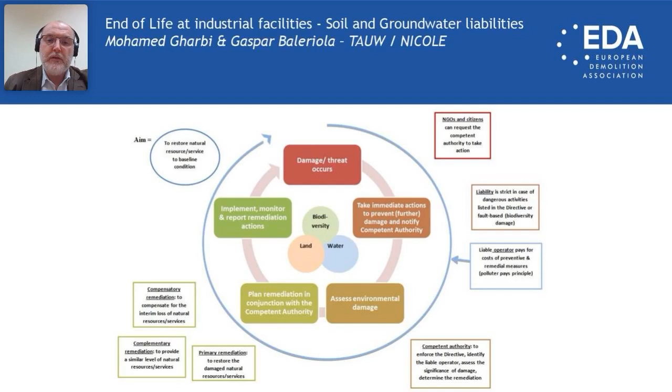So this is a process that involves the whole life cycle of an industrial facility, because you have to do that in advance. You have to plan in advance what kind of damage you are going to do, to get a risk assessment, an industrial risk assessment for that, and have somebody say how much damage is that, what are the chances of that damage happening, and then setting a value of that damage. So we go into that in the next slides.

So if you are a contractor in demolition, are you affected by this? Well, not directly, because you are not the operator of the facility. Only the operators of the facility or the owners of the land. If this is a brownfield, for instance, maybe you're asking, I'm going to make a demolition of a brownfield, which is difficult to say who is responsible for that. Then the owner of the land will be liable, okay?

So this is going to take place at the end of life of a facility, then demolition has everything to do with it, because usually all these kinds of works of remediation and restoration take place in this end of life step. So maybe even you, as a contractor, will be the one who is going to carry out the restoration of the damage, which in this case will be a soil or groundwater remediation. So again, you can even be affected directly by this directive if, by this negligent or default option, you may be causing an additional damage to that.

You know about this, because maybe you have to contract insurance for your work. Your insurance is going to be more expensive because you are dealing with hazardous substances, and because of the possibility of you, as operator of the demolition, causing any kind of damage. So following the polluter pays principle, who is going to pay for all this? Well, of course, it will be the polluter, the operator, but that's our clients. So how are they going to pay for that?

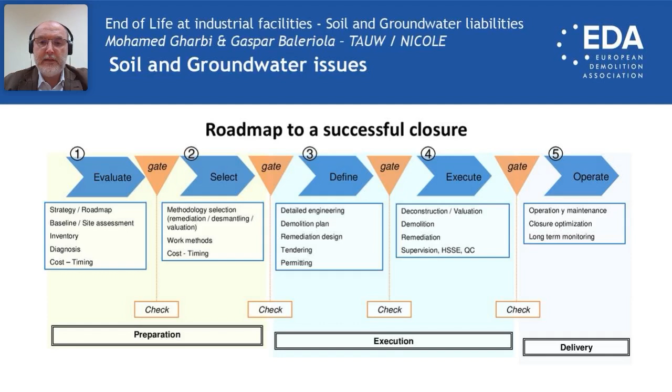And finally, you will be delivering the demolition with the soil and groundwater remediation, and have your permits to go away and make the actual closing down of the facility with no further liability.

So into the final part of my presentation, I'm going to speed up things a bit. Some more tips about soil and groundwater.

Be clear that when you are going to do remediation, you could take some of the affected soil by excavation along with underground structures, but that's not going to be the solution in general, because that will only address a fraction of the problem. Always think that groundwater is going to remain an issue, and this could be for years, even decades.

Be sure that you don't have a substantial groundwater impact, because that is an order of magnitude more complex than soil affection. You have to make sure that you have all the sources planned and mapped. During dismantling operations, you have to be very careful about tanks, pipings, and everything, because that could cause additional damage to what you already have.

And of course, you have to take into account all of the extra waste made by the remediation works into your waste management plan, because sometimes it could be even more substantial than your own original waste plan.

And of course, you have to make monitoring works not only for your demolition works, but also for these two components, water and land.

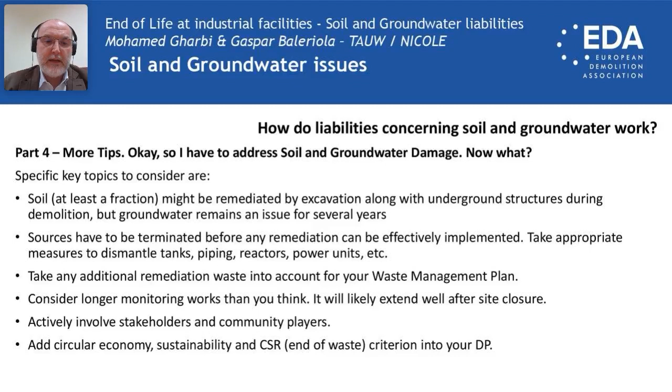Some useful tips: you should involve stakeholders and community players into your plan, because that will save you a lot of time and social pressure. Make them part of the solution, don't turn your stakeholders or the community players into a problem. They are also part of your plan. And try to make that in a sustainable and corporate responsible way.

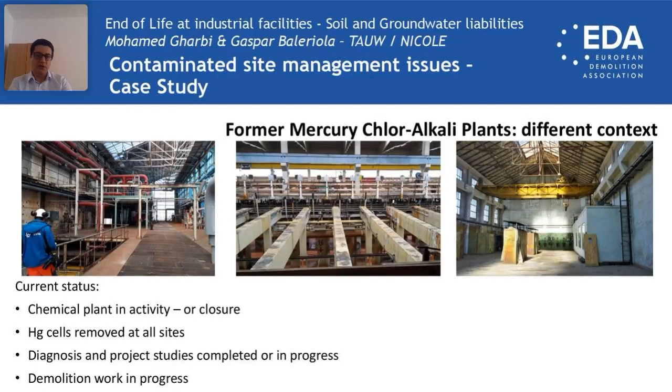What about the process? So we have here a former mercury chlor-alkali plant. I want to summarize the process. Chlorine alkali electrolysis was used to produce chlorine, hydrogen, and caustic soda from salt. Then metallic mercury was used during the electrolysis process. The electrolysis of salt solution in this plant is carried out according to the amalgam process between the titanium anode and the mercury cathode.

Due to the process steps, the emerging material flow as well as all equipment and pipelines are contaminated with mercury. Due to the interconnected facilities in the process, we can observe direct contamination with mercury, with the presence of liquid mercury in some facilities, and indirect diffuse contamination with mercury throughout the building material and waste. In addition, the emission of mercury-containing dust during the demolition work has to be taken into consideration in that case.

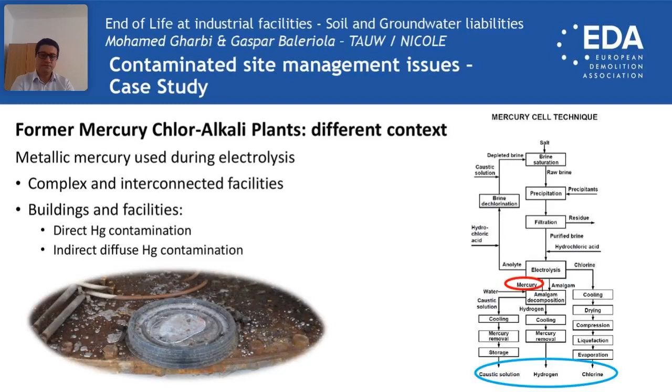We have some major challenges within this type of work. The major challenge for us, first ranking, is safety. Of course safety is the main one. We have multiple risks due to the state of the building, the technology, year of construction, also the presence of various types of contaminants like mercury, PCB, dioxin, asbestos.

We have a lot of co-activities with mainly potential explosive atmosphere close to our workplace. So within operation of the dismantling work, we are confronted also with significant health and safety aspects, like working at height, working with fire, heavy equipment, confined spaces and utilities. So it's very important to keep the worker healthy. People protection is the main focus during such type of works.

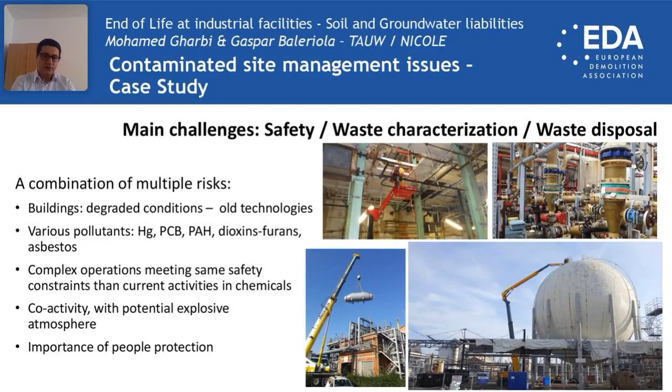The second challenge is waste characterization. How could we quantify and qualify waste and identify the legal, correct waste pathway? So first we have to make a good assessment of the quantity of waste that will be generated during the demolition work. For this, we usually make a detailed desk study that gives us very good information about thickness, extent, and dimension of contaminated substances. Following that, we perform on-site measurements and inspections, using also drones to build 3D models, which gives us a good combination between safety and the quality of the data.

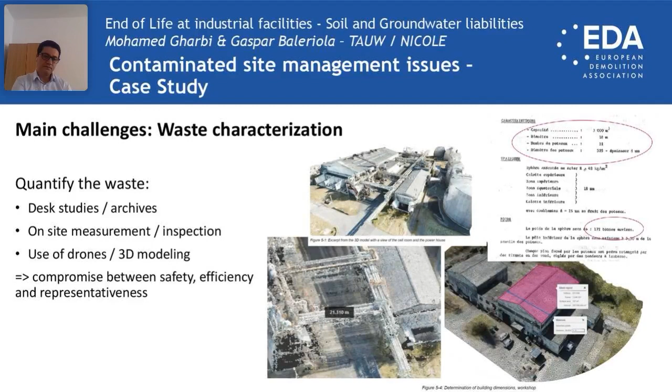So then we have to qualify the waste. After quantification, we have to qualify this amount of waste in order to define the classes of waste. So for this, we made a lot of site measurements by means of different field screening equipment, for example XRF, Jerome, and phaser. By means of this measurement on site, it helped us build a good sampling program in order to analyze the different components of the building. We collected a lot of samples and performed, in addition, laboratory analysis in order to have an idea about the concentration, the level of contamination.

Some asbestos material is contaminated with mercury. For that type of waste, we don't have the full-scale lab equipment adapted, so it's considered to be hazardous waste directly.

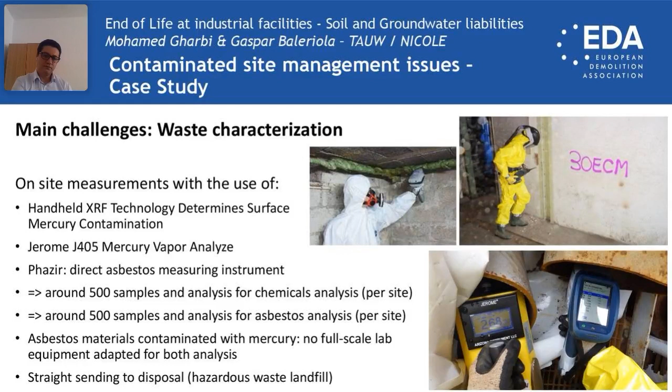The third challenge for us is the waste disposal. How could we define the disposal way and which measures could we conduct on site after demolition? How could we manage this amount of different categories of waste? This is the last big one: to define the correct disposal way for each category of waste.

So we have different types of waste. The first one is decontaminated. Then we have hazardous waste with mercury, where we perform additional on-site treatment like specific stabilization, then final disposal in a landfill. We also have hazardous material with PCB, which we treat by incineration and final disposal. The dangerous waste with mercury and asbestos, the way is underground disposal. And then we also have metallic mercury, where the stabilization process was conducted in order to reduce the level of contamination before transport, and also to reduce the emission aspect.

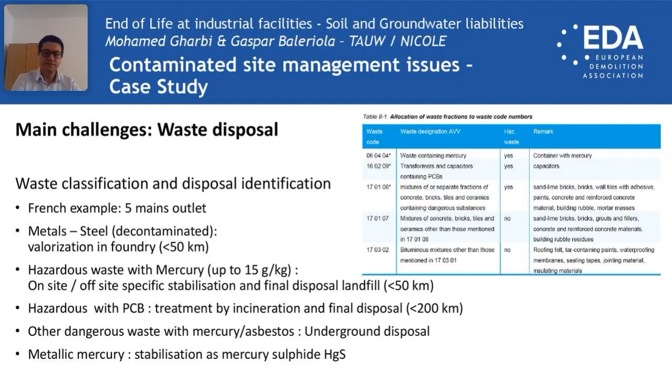So here we have the lessons learned. Of course, first lessons are about safety. Our goal during this type of work is zero incidents. I want to highlight the importance of daily supervision, helping in the prevention of risk. It's also very important to perform last-minute risk assessments, daily brainstorming, and the take-5 action before starting the day's work. Then it's also very important to perform regular medical surveys in order to check the exposure level for workers working in contaminated areas.

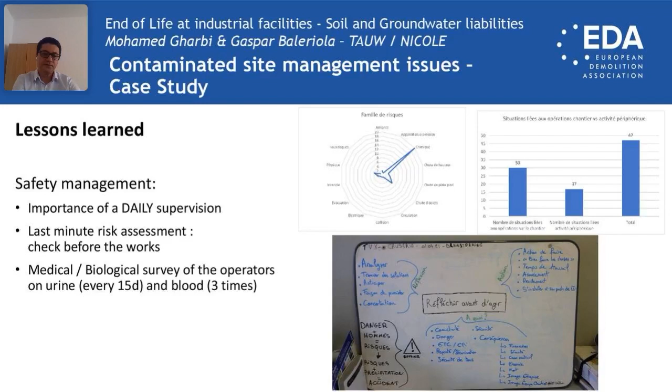An additional aspect to be learned during this type of work is planning and anticipation. It's a key issue. So work preparation is very important, and good sharing of information and communication between different stakeholders is the key to success in this type of work. We also have waste elimination: the importance of anticipated exchanges to secure every step of elimination, and the importance of a second characterization during demolition work to optimize, when possible, the waste route. This is very important because in the first assessment we usually have some data gaps which could be completed during the second characterization.

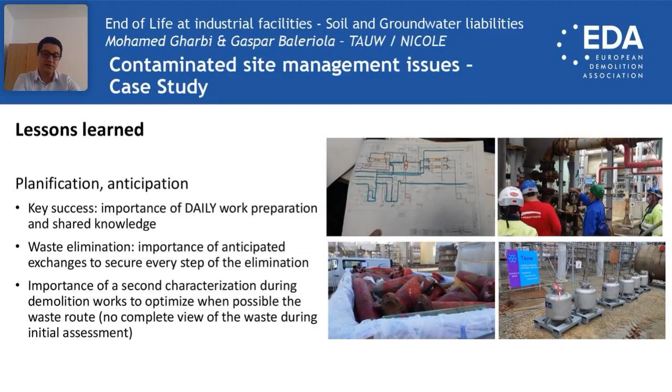So if you have the survey, this is my question to you: please give the answer. Do you usually take soil and groundwater issues into your demolition plan? Very much, the majority respond with yes. It's a very important issue. It depends, of course, on the type of activities or operations and the relevant chemicals that may be used inside. Mainly we are dealing with industrial chemicals which could infiltrate into the surface and impact the soil and groundwater, so it's very important to take this into consideration. Not only the substances in the building, but also soil and groundwater issues have to be considered, and perform soil and groundwater investigation to try to delineate or limit the extent of chemicals in order to have a good basis for a remediation plan if needed.

Thank you very much.